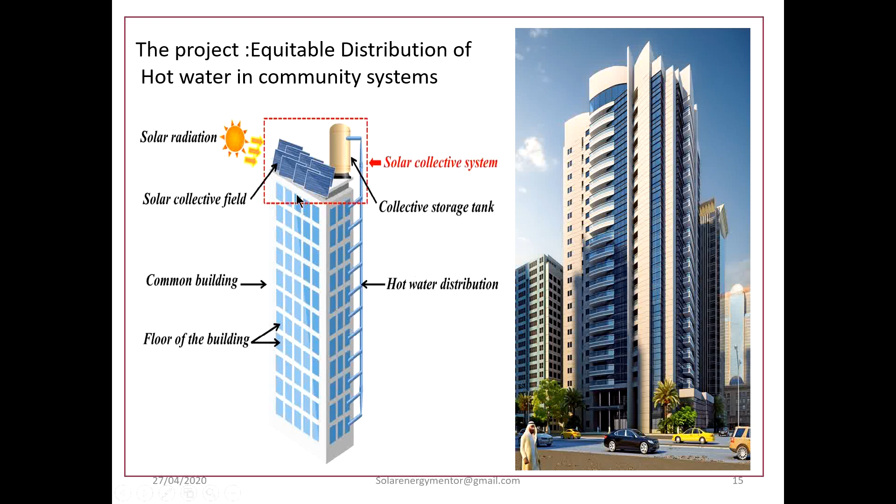Another project: solar water heating systems are also used in industrial process heating applications. In industrial process heating applications, there are certain applications which require a fixed temperature. For example, monomer applications in the plastic industry or other polymer industries, there are certain processes which take place in a reaction vessel in a staged manner. So every stage demands a fixed, very strictly maintained temperature at, say, 57-58 degrees Celsius.

This temperature to the process is supplied by hot water. So if there is a slight change in the hot water temperature supplied to the process, the quality of the product coming out of that process will be hampered. So in industries, there are two things: strict control of quality and reliability. These two things are needed from the solar water heating system.

Of course, industries don't totally rely on solar water heating systems. They have auxiliary systems, but whenever the solar water heating system is delivering hot water, it is expected that it should deliver at a constant temperature or the required process temperature.

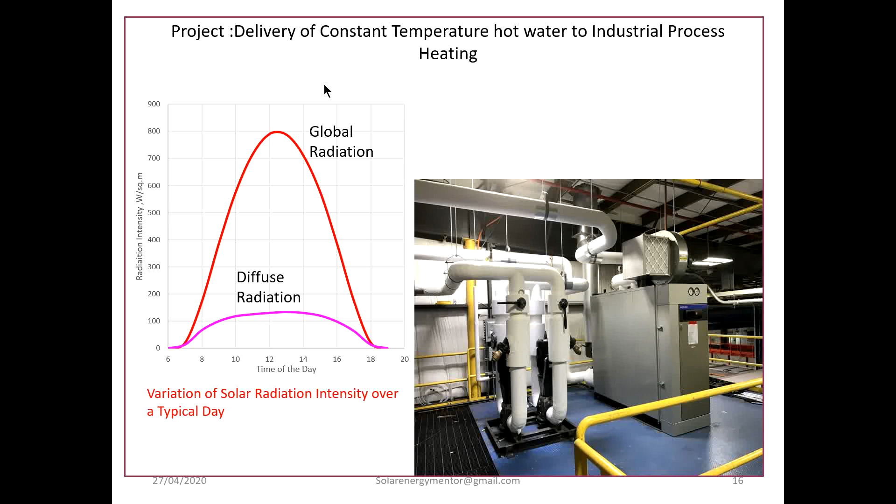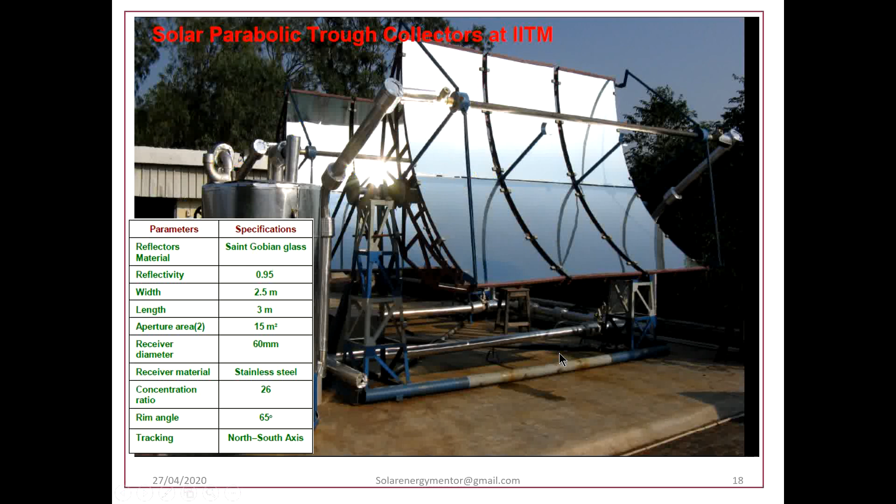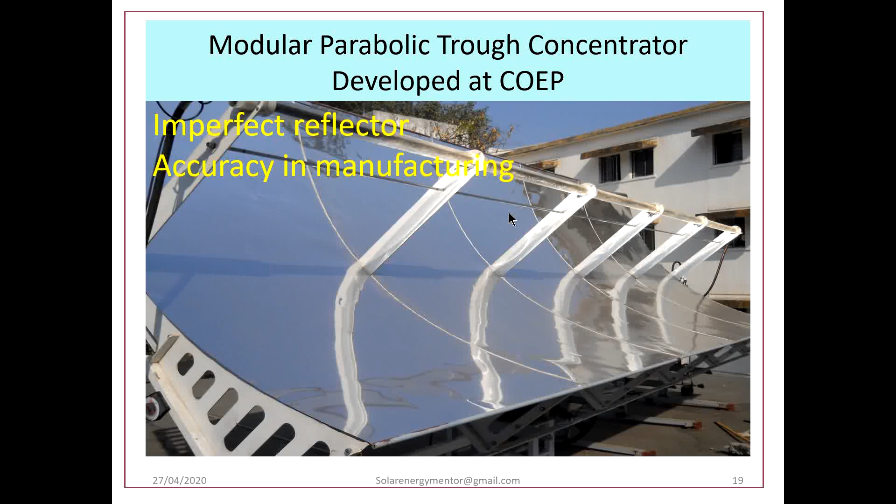You can see the serrations here. So here there are dimples. We could not make a reflector as plain as glass. This being an anodized aluminum surface, some dimples are formed, and those dimples created scattering, imperfect reflection, and due to that temperatures were less. So this lesson we learned in this project. So this is a side view of the parabola, the parabolic trough collector produced at our lab.

So this is the parabolic profile, and this is the tracking mechanism we have used, and this instrument we have used for monitoring the extent of tracking. Here you can see the bright light; solar energy is concentrated here. You cannot see it with the bare eye; you have to wear goggles to see this point. So we get extremely high temperatures of the absorber surface at this point.

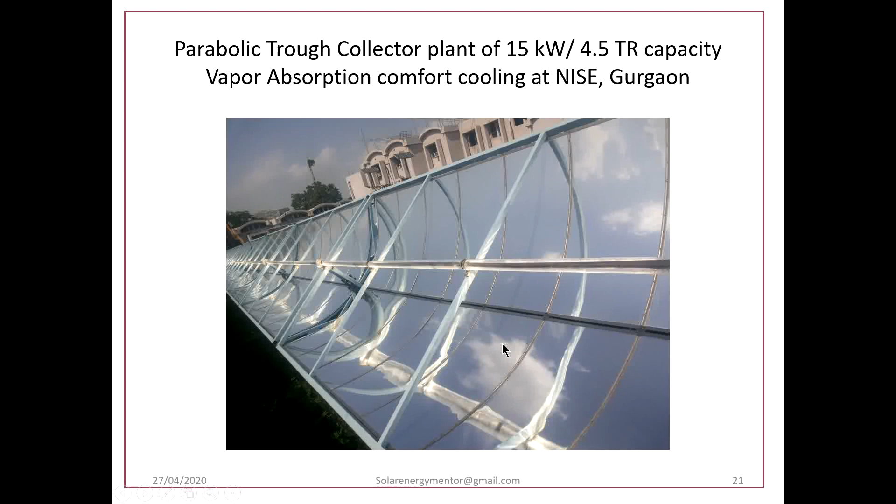So this is another example of a parabolic trough collector installed at Gwalpahari, National Institute of Solar Energy, Gurgaon. The rating of this parabolic trough collector assembly is 15 kilowatt. It runs a 4.5 TR capacity vapor absorption system for comfort cooling in a block of NISE.

So this is again the same photograph, the parabolic trough collector plant for air conditioning at NISE Gurgaon. This is 96 square meters. You can see here how the structure is, how it is supported. This is the thermic fluid line. This is the support here, and then how light the structure is.

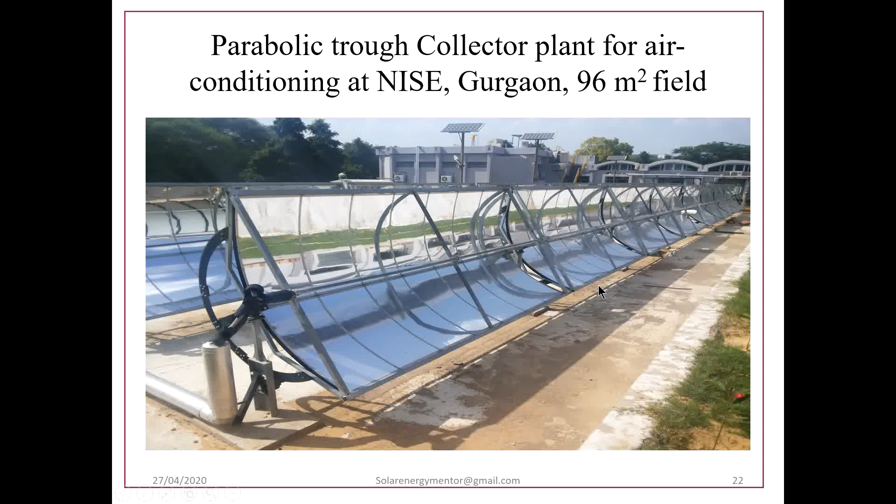So there are different designs available. There is again a challenge for engineers to come up with a low weight and light design. These are the parabolic trough designs which are used abroad. You can see here how light the structure is. So the structure has to be light. It is a tubular structure, and you can see the size of the structure.

The man is standing here, and the height of the parabolic structure is starting from here, and the focus is here. So it's really challenging to engineers to design such structures. And in addition, the structure is tracking the sun, so it is moving with the sun. So that is really an engineering challenge.

Now, another type of concentrating collector is called the Scheffler dish. Scheffler dishes have been very popular in domestic applications, or in non-profit applications. So the Scheffler dish is a dish type of collector. You can see here, this is a cylindrical parabolic. Sometimes parabolic trough collectors are called cylindrical parabolic.

Why are they called cylindrical parabolic? Because this is a parabola, and then it is extended over a cylinder across the length. Any length you can go on extending. So this is a parabolic trough collector, cylindrical parabolic collector. However, a parabolic dish is a dish type of collector. It doesn't have any length. If a parabolic profile is revolved over its axis, then you will get a dish. So the Scheffler dish is a dish type of collector.

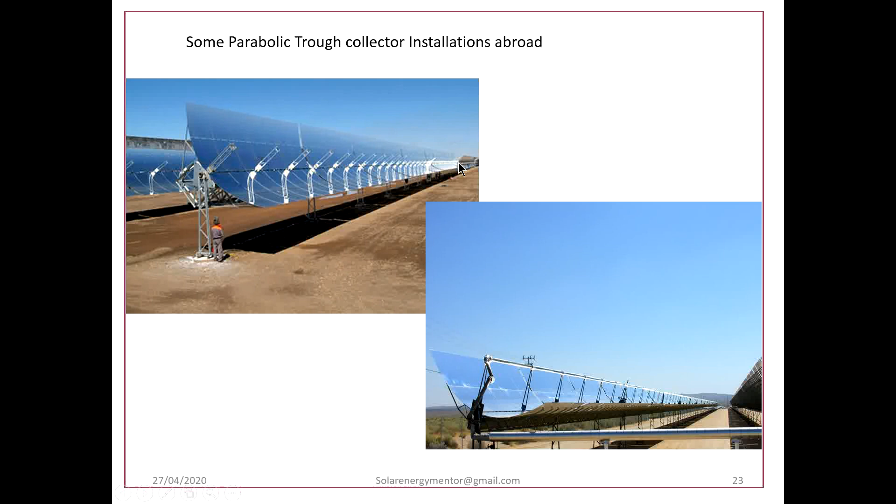The difference is that, you can see here, when the sun moves from this direction to this direction, the collector tracks the sun like this. So simultaneously, the focus is also moving, the entire assembly. If the collector is moving following the sun, the focus is also moving along with it. So it is a moving focus in the parabolic trough collector.

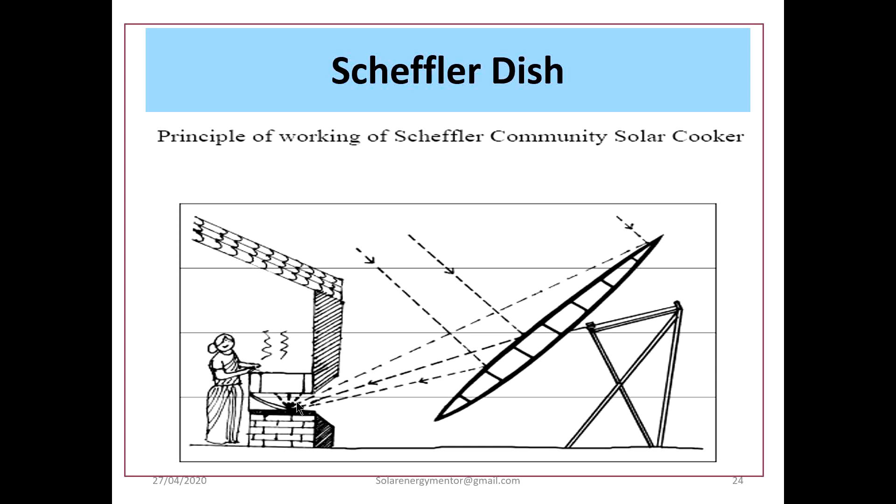But here you can see the Scheffler dish collector is a fixed focus. It is receiving sun rays in this direction, and then it is focusing all the solar energy at a certain point. The maximum temperature obtained in Scheffler dishes is of the order of 120 degrees Celsius. So it is suitable for hotels, hospitals. At Shirdi, these Scheffler dishes are used. At Mount Abu, Brahmakumari ashram, they are being used.